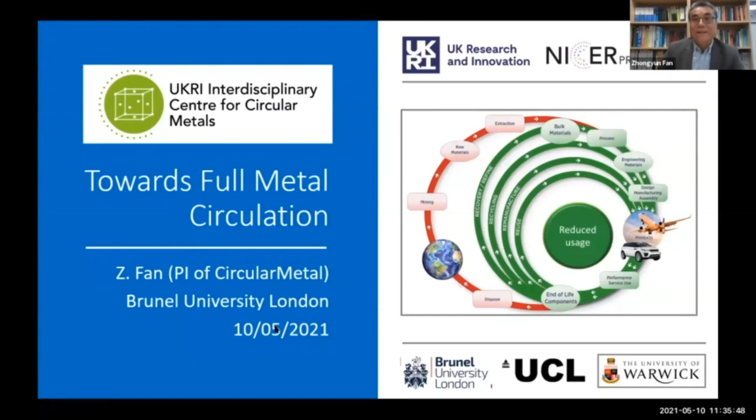In the next 10 minutes or so, I'll give you a very brief introduction. Thank you very much to all the previous speakers, Julia, Nick, and Fiona, for setting up the background for this center. Can you go forward? Okay. Resource consumption here, okay.

The Earth has been here for 4.5 billion years, and human beings arrived on this planet only about 200,000 years ago. But human beings have made a big splash on this planet. Particularly in the last 200 years, after the Industrial Revolution, resource consumption changed from a circular manner to a more linear manner. And more importantly, after the Second World War, resource consumption became exponential. As you can see from this diagram, after 1945 there's an exponential growth of resource consumption, coupled with fast GDP growth and followed by some degree of increase in population. So we need to see why we are doing this.

Can I have the next slide?

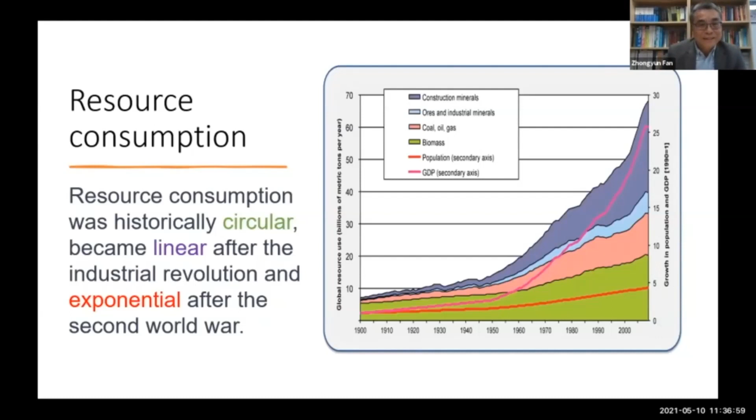This linear resource flow is causing us big problems now. As the previous speakers already mentioned, for a long time the planet we are living in was almost circular. In the last 200 years, we've taken a huge amount of resource from Earth to fuel our economy by making different things. After usage, most of them become waste and are deposited back onto the planet. So what we are doing, basically, is undermining the planet as an ecosystem.

The ecosystem is shrinking in size and volume, while our economy, the human economy, is growing. So there's a head-on collision between shrinking nature and our human economy. The consequence of this is that our global ecosystem is shrinking and losing its power to sustain life.

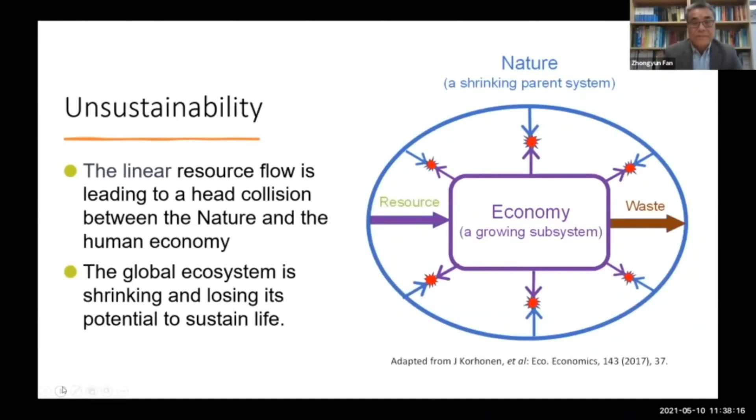The deeper reason for this is how we position ourselves in relation to nature. For a long time after we arrived on this planet, we feared nature, so we worshipped it. After the Industrial Revolution, we started to change our mind—we began to position ourselves as masters of nature, and our aim became to conquer nature. That's how we developed this linear way of thinking, this linear economy: we make, we use, we deposit, regardless of nature's ability to regenerate and regardless of the needs of future generations. Next slide.

Now I'll take an example. Most of you may be familiar with the steelmaking process. This is a typical example of linear technology as an outcome of linear way of thinking.

To start with, you have mineral mining and processing, utilizing carbon to reduce iron oxide to produce liquid iron, which is quite often called pig iron. The pig iron, because carbon is used to reduce it, is saturated with carbon, about a few percent, and it's very brittle with much less usage.

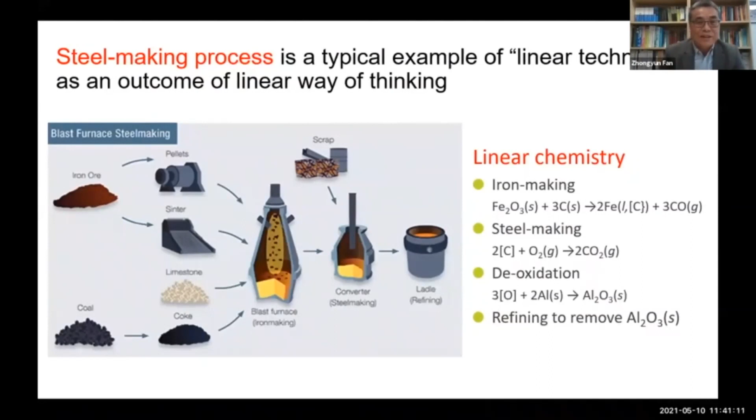It's a linear way of thinking. We try to resolve one problem, but at the same time it creates a bigger problem for the next stage to resolve. In the future, we need to rethink how we do our science and technology and change our way of thinking.

We are living in an unsustainable world. So circular economy, by and large, is aiming to rapidly reduce or eliminate extraction of raw materials or production of waste. Next slide.

But in a broader sense, circular economy goes well beyond economy. First it's a philosophy, which defines our position in nature. As I mentioned before, we position ourselves as master of nature in the linear economy, but in circular economy we should position ourselves as friends of nature.

Of course, it's also an economy. With circular economy, all economic activities have to be bounded by nature's ability to regenerate. And for the research community, circular economy offers us a great opportunity to rethink our science and technology, how we develop and employ it.

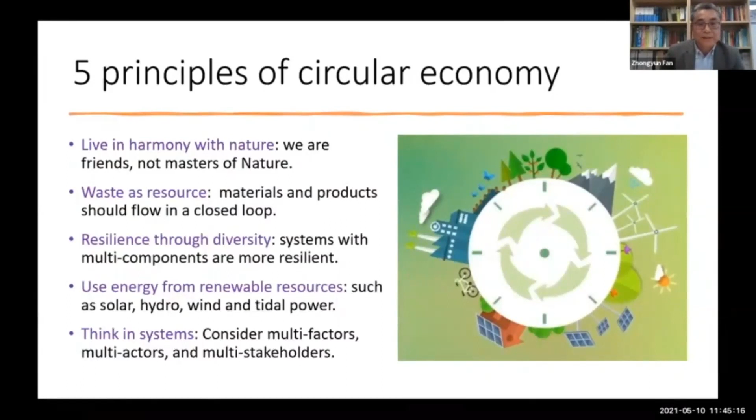Our long-term vision for our center here is based on circular economy principles, and we aim to achieve full metal circulation. Under full metal circulation, the global demand for metals is met by secondary metals through reduce, reuse, remanufacture, recycle, and recovery. Of course, this means no more mining and no more metal extraction.

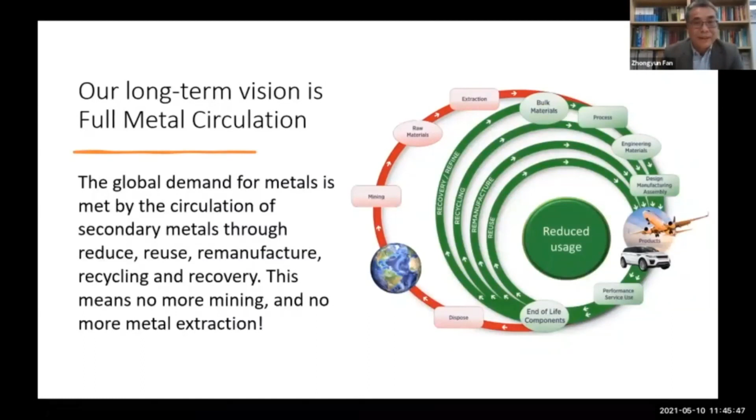Circular metal, our strategy in our research, is to deliver full metal circulation through closing the loop, narrowing the loop, and slowing down the loop. Through these three approaches, we have set up a number of research areas shown by the circles around the metal flow here, including circular alloys, circular technology, circular macroeconomics, circular pricing and policy, and circular society.

Of course, we should also include circular supply chain, circular business models, and circular product design. These are interdisciplinary research areas, and so much needs to be covered.

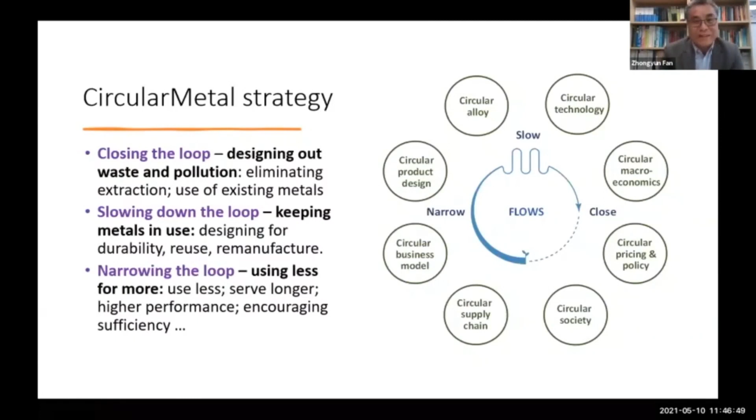But we only have 4.3 million pounds to start. We are lucky to have this starting point, but we cannot do everything across all these areas. So we set up projects in specific strategically important areas to reflect the intertwining of 5 socio-economic facilitators and 5 technological enablers, as shown here.

The technology enablers include reduce, reuse, remanufacture, recycle, and recovery. The socio-economic facilitators include design principles, business models, sustainable supply chain, macroeconomics, circular policy, and circular pricing. Of course, we need to have a circular society.

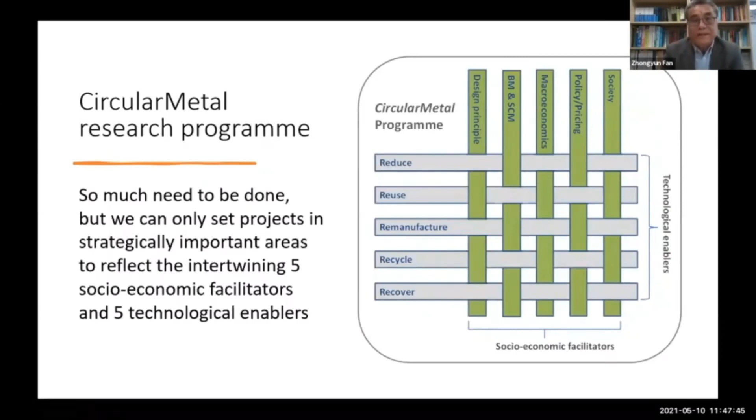I have here, just very quickly to illustrate, two examples of our ideology for doing research. The first one is circular alloys, which is a typical example of a circular approach to future alloys.

Historically, all metallic alloys have been developed in a very fixed way. We select a metal, normally purify it, and then add some other elements to improve the mechanical or physical performance of the alloy.

By doing this, and also through free market economy where everybody wants their own alloys, minor changes of composition and processing conditions lead to different grades. So we end up with thousands of grades of metallic materials around the whole world.

These metallic grades normally are not resilient to change. For example, metals are theoretically supposed to be recycled infinitely. However, in reality, metallic alloys cannot be recycled directly. For example, with aluminum alloy, when you recycle it, the mechanical performance is very much degraded. You have to do a lot of treatment and processing before they achieve better performance.

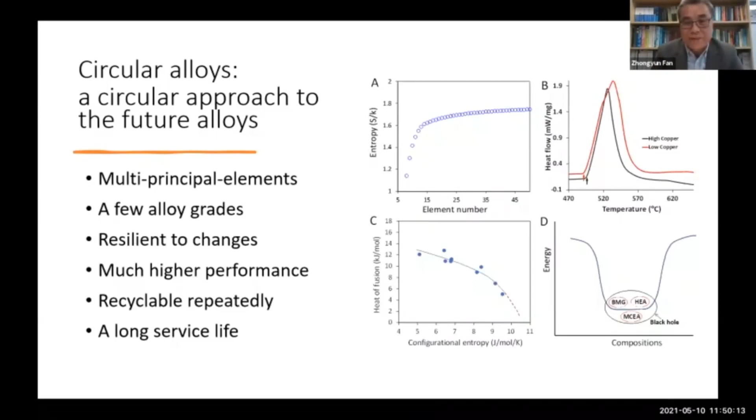In our research, we are searching for a specific multi-principal elements composition space. Multi-components here means not 5 or 6, but 10, 20, 30 elements, with no principal elements - they're all equally important. By doing this, in the future we will only have very few grades of high performance materials.

Next, I want to show our idea about the future - in the future, how are we going to use metallic materials? In the linear economy, metals are extracted and made into components, which are put into specific devices for applications. After usage, breaking, or damage of the metallic components, we throw them away or recycle them.

That's how we currently treat metallic materials and components. One fact we need to bear in mind is that metals are similar to human beings - they get tired, so-called fatigued. After prolonged service, metallic components get fatigued, but we never ask how they feel and how they perform.

Is there a need for recovery after fatigue? In the future, we aim to develop something similar to the National Health Service in the UK, NHS. We try to develop a metal health service called MHS, which will change our way of using metals from a slavery approach to a partnership - a partnership means we look after metals so they can serve our purpose better.

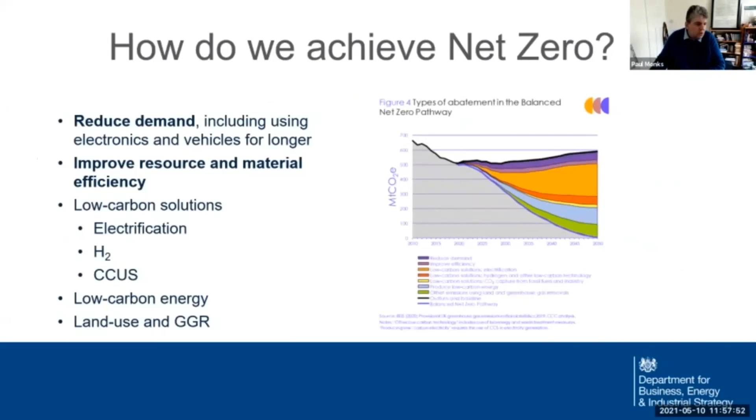So really this demand and resource and material efficiency is absolutely critical and central to the vision of net zero. I think you've had this already, but we've just, as the Department for Business, Energy and Industrial Strategy, produced this industrial decarbonisation strategy, which really talks to the heart of this - questions around industrial efficiency and material substitution, and the support of resource efficiency and the circular economy model, including increasing reuse, repair and remanufacturing. That moving away from the linear model, I think, is important.

One thing I think is always very important to think about when we talk about net zero, when you talk about the circular economy, we've not got to imagine this is solely a technocratic solution reached by just deploying technology. In the Carbon Budget 6 produced by the Climate Change Committee, who advise the government on this, they made the point strongly that you've got to get the societal and behavioural pathways to net zero working together. That's very much true in the issues around the circular economy and metals and recycling. You've got to choose products that last longer, but also products designed to recycle, and that's a real challenge when you're trying to drive efficiency as well as reusability at the same time. So as you think about technological solutions in the centre, I challenge you also to think about the behavioural wrapper around this, and how we'll need to change our behaviour to meet net zero.

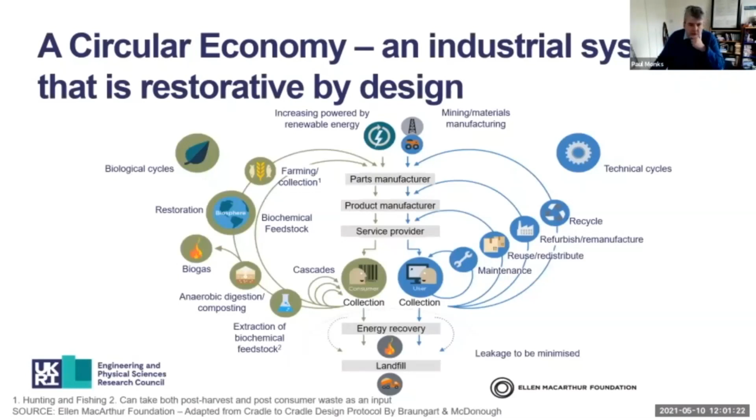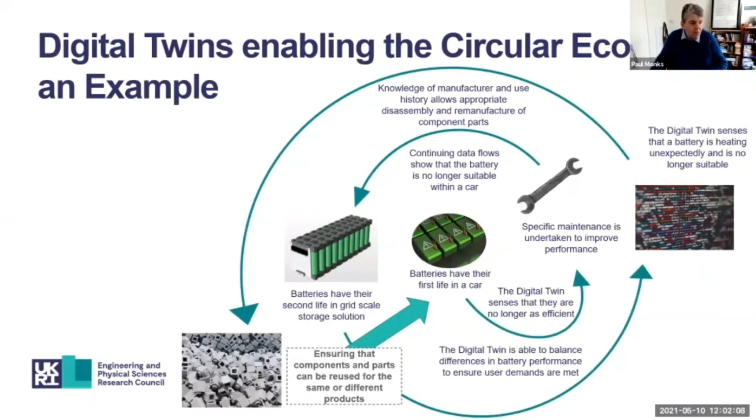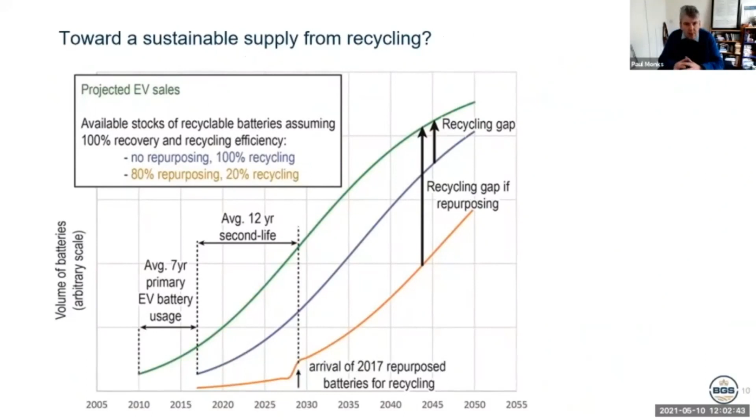I think it's trying to understand that systems approach and that sustainability alongside the circular elements of a recycling economy. So hopefully that big picture perspective, down from net zero to the circular economy, provides a perspective that I hope the centre will be able to respond to.

As I said, achieving net zero and mitigating climate change will require this kind of systems approach. We will require increasing resource and material efficiency to drive that circular economy. And I absolutely believe that science is critical to this, a combination of research and development, technology, and the behavioural sciences.

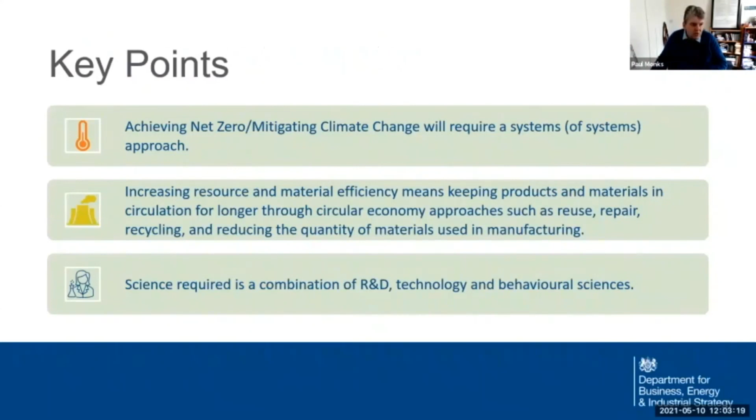That will be needed to pull together this transition to net zero. So thank you very much for inviting me. And I've already tweeted about your launch today, which I wish you all the success with, this centre which is very, very much needed and very much an important area in trying to achieve the challenges of net zero and those of the circular economy. Thank you very much indeed.

That was Professor Paul Monks, and thank you very much for that talk, Chief Scientific Adviser to the government. Next up, we have Chris McDonald, CEO of the Materials Processing Institute, and he will be discussing the circular economy as an opportunity for the UK metals sector. So I'd like to hand over to Chris McDonald.

Thank you, Mark. And it's a real pleasure to be here. And I'd like to also thank Professor Fan and the team at Brunel for inviting me to speak to launch this really, I think, vitally important new UKRI interdisciplinary centre for circular economy and metals.

Now, my background's in steel, and in fact I've spent my entire career working in the metals sector. And during that time I've had the great pleasure to get to know Professor Fan and to appreciate the tenacity with which he's built a great capability at Brunel, which started first in light metals and is now focusing on the circular economy. So I think all of us who are active in metals technology and research in industry, as I am, are grateful to Professor Fan and to Brunel and UKRI for their ongoing commitment to research in this really vital area.

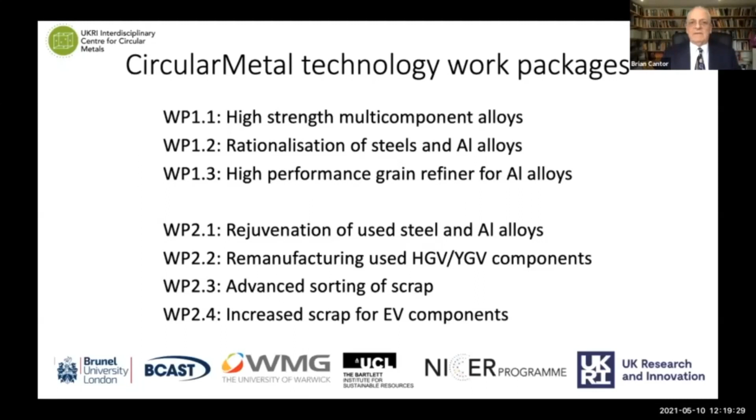I'm going to go through some of these in a little bit more detail, but not very much—I'm not going to talk through all these slides because there's too much to cover. Just to give you a little bit more of a flavour, and please follow up, get in touch with us if you're interested in these things, or things in the interstices between them.

As Mark already said, I was involved in inventing the field of multi-principal element alloys, along with two other people who invented it independently some time ago. It's been discovered that if you have alloys with large numbers of alloying elements, which we've never done before, they are resilient to adding even more alloying elements, and you get even better properties than conventional alloys if you tailor them right.

So we have a particular project to apply this to recycling, which, by the way, was thought about 20 years ago when this field started, but has hardly been taken forward by anybody.

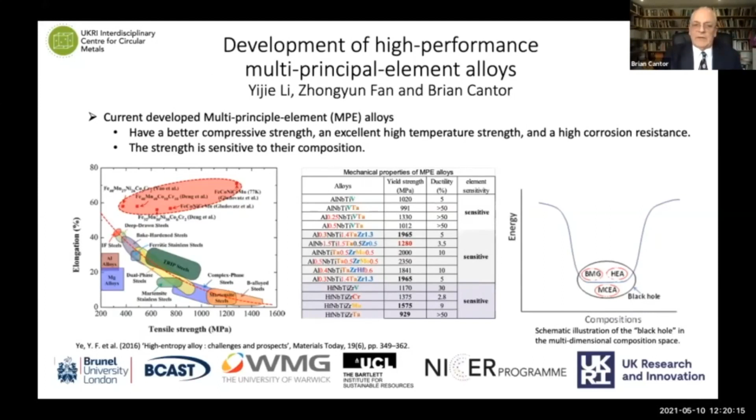We also have at BCAST lots of new technology recently developed by Professor Fan and his colleagues for how to control nucleation during solidification. We're going to need to use more casting, partly to replace wrought products because that uses less material, but we need to get better quality castings, and also because we need to recycle.

When we recycle, we don't want to recycle back to the smelter and treat our recycled scrap as just on a par with new ore. We want to, if we can, just remelt it—that's a lot better. The new methods of controlling nucleation to keep the grain size small and to control the nucleation of undesirable intermetallic compounds is critical, and the wherewithal to do that has been developed where it needs to be applied.

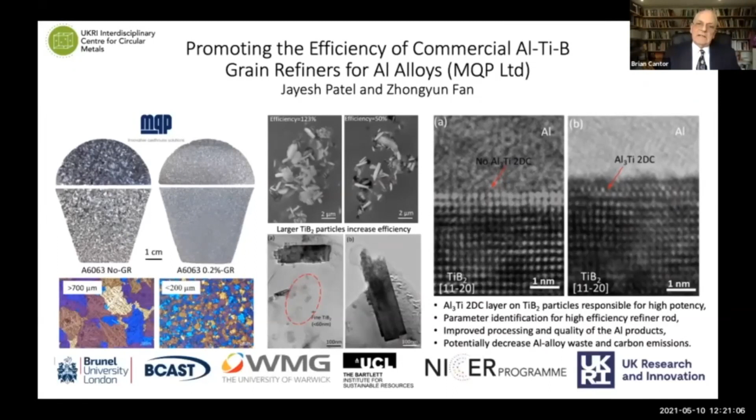This is the health service idea that Professor Fan talked about. We can use advanced monitoring and measuring techniques, sensors, to detect fatigue cracks as they grow and develop in a material. This is rather like health monitoring already used in a number of places, notably the aerospace industry, to monitor components, but this is at the materials level.

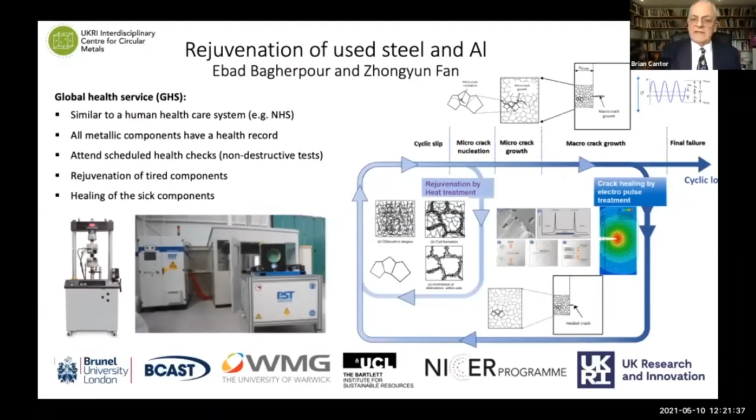We can use advanced sensors to monitor the performance of material, detect when it's beginning to change, and use advanced rejuvenation methods to heal it—in many cases perhaps in situ, but certainly demounting it and replacing and/or rejuvenating it much more quickly. Similar sort of thing here.

Here's a specific case of doing this with heavy-duty goods vehicles, where there's a project with industrial partners to take the big steel components in these vehicles and use advanced sensing, advanced lifing methods to rejuvenate, remanufacture, and reuse these very large amounts of steel much more effectively.

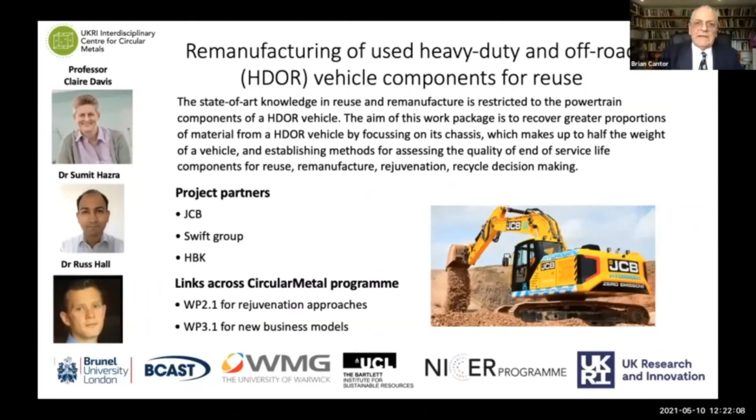And we're going to develop computer-based vision systems for monitoring and for sorting, as well as the system management of scrap.

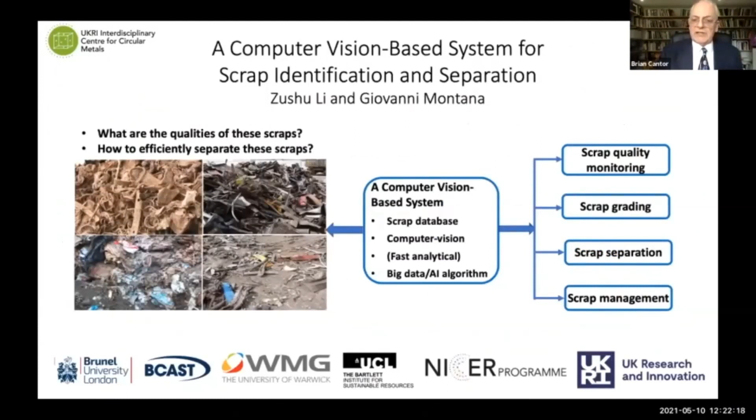Here are two last examples using the same kind of approach in specific cases. Electric vehicles are beginning to use, for the first time, extrusion, rolled sheet, and cast scrap all merged together. To do this for electric vehicle usage, you need advanced sensing, advanced sorting, and new alloy formulations.

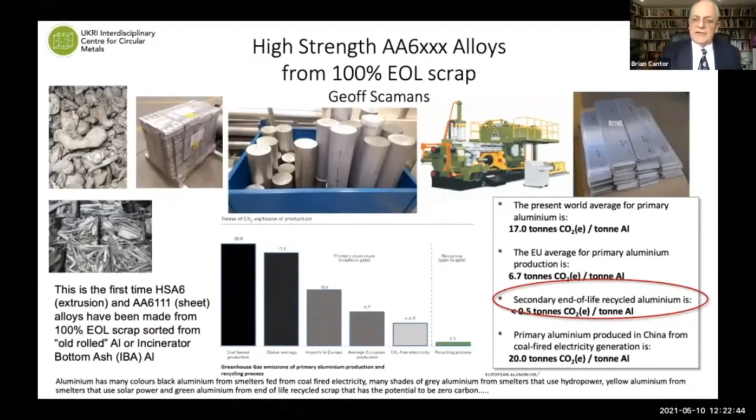And a similar sort of thing in the aerospace industry for the alloy RR1000, using a newly invented method of melt conditioning, using shearing to make sure you can get the right sorts of structure.

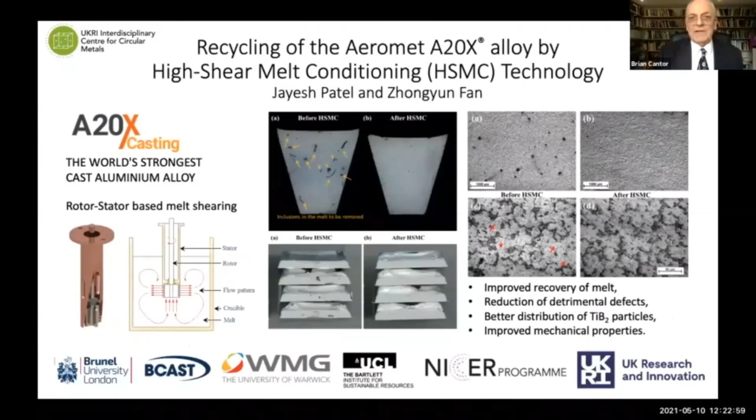So that's all from me, just a bit of a taster and a rapid run through, but we want your input. Please come and talk to us about those projects, contact us after the event, and also contact us if you've got lots of interesting things to do in between these, because there's an awful lot more we can do, since we are meant to act as a centre for the growth of the community. Thanks a lot.

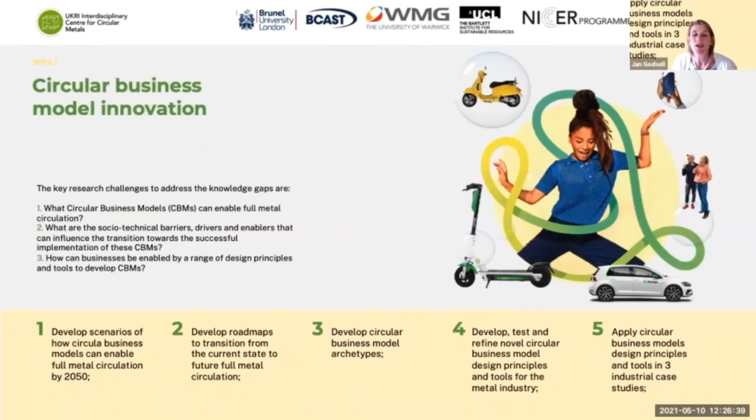So what you're going to see is a programme of work over the 4 years that answers a range of different research questions. With that first package around business model innovation, we'll be answering questions such as: how can circular business models enable full metal circulation? What are the socio and technical barriers and drivers that could enable that successful transition? And how can these businesses be enabled by a range of different design principles and tools to enable those circular business models to take place?

From a supply chain perspective, we're going to be looking at those supply chain design principles - this idea of 3D concurrent engineering, designing the product, process and supply chain simultaneously, is an old idea. It absolutely pains me to see so many organisations so focused just on the product. Having a background in pharmaceuticals and working for Dyson in the early days, these were very product-orientated organisations. Some think a little bit about the process, but very few organisations think about their supply chain design from the outset. We think that in order to really make the breakthrough in terms of the circular economy, we do need to do that.

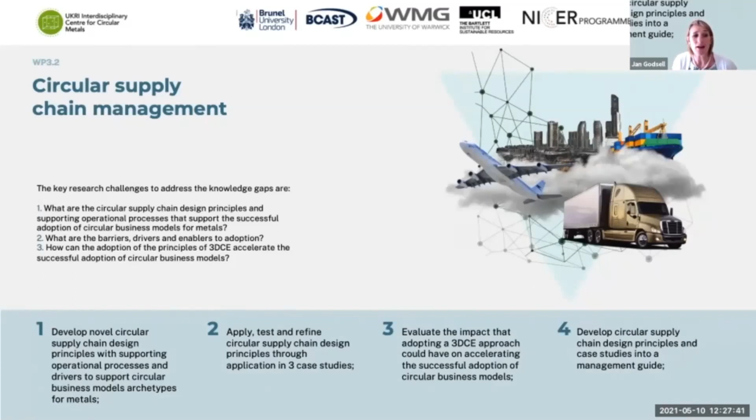What we also need to understand is, if this is such a straightforward principle, why haven't people done it? So what are the barriers, drivers and enablers to adoption, and how can overcoming those help accelerate the successful adoption of circular business models? Last but not least, the research questions we're looking to answer through the circular product design principles look at: if we want to align product, supply chain and process, what are the product design principles we need to embed that will actually enable that to take place?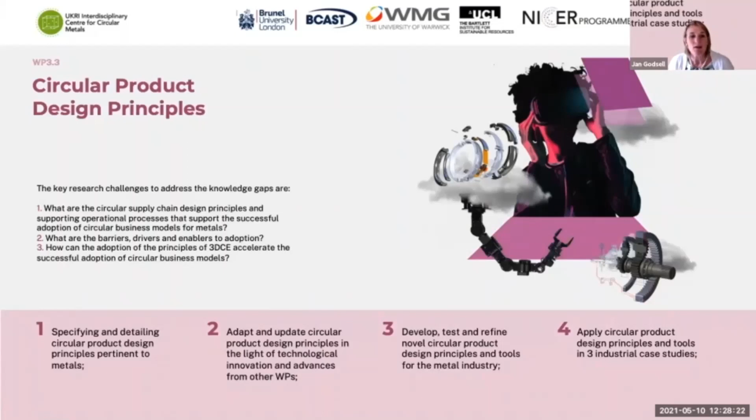And again, I think this is a common theme when you start to look at types of work where you actually want to drive change in the real world. You need to understand those barriers and drivers, and also this idea that we want to accelerate the adoption. So to bring these three work streams to life, what we're actually going to do is work on three case studies.

And what you'll see, you can see that big JCB at the front there. So what you can also tell is that we're going to dovetail nicely into our colleagues working on the more technical work packages, and also our colleagues from UCL. I'm just about to hand over to Raymond in a moment, who is working at the more economic and social orientated work packages. But we're looking at three different sectors that we think show the full range of the product process choice matrix.

So on one end, we've got fast moving consumer goods that are high volume, relatively low variety, and actually get directly into the hands of the consumer. In the mid range, we've got yellow goods, the likes of a JCB, and at the other end of the spectrum, where we've got very high variety but low volume, we have the construction industry. By actually working on real life case studies in these sectors, we will bring the research questions I've just presented to life. Thank you very much.

Thanks, Jan. That was Professor Jan Godsell on our circular business model research.

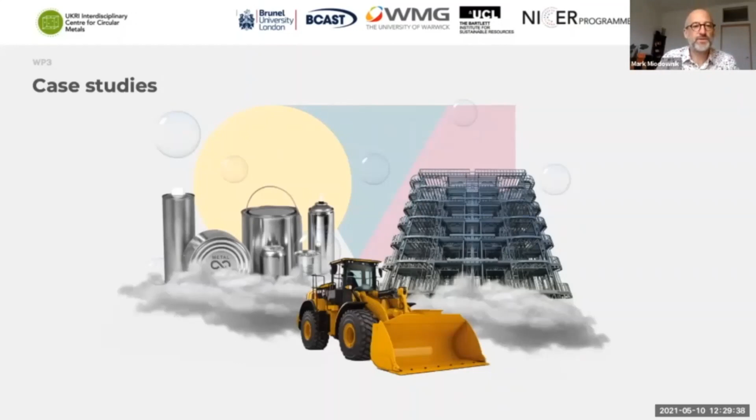And as she alluded to, this centre is now working in collaboration across universities. I'm going to hand over to Professor Raymond Bleischwitz, who is going to talk about the circular macroeconomics modelling and research being carried out. Professor Bleischwitz is Director of the Bartlett School of Environment and Energy and Resources at UCL, and he is Chair in Sustainable Global Resources at the UCL Institute for Sustainable Resources.

Raymond, over to you. Well, thanks, Mark, for your very kind introduction. It's also glad to see two UCL people, at least now for a few minutes, being here on the screen. Raymond Bleischwitz, Chair in Sustainable Global Resources and Director of the Bartlett School.

So we are impressed by what we heard before, the relevance of the UK metals industry with over 11,000 companies, and underpinning as a foundation industry roughly 200 billion of the UK GDP. So it is quite a relevant part as a foundation industry.